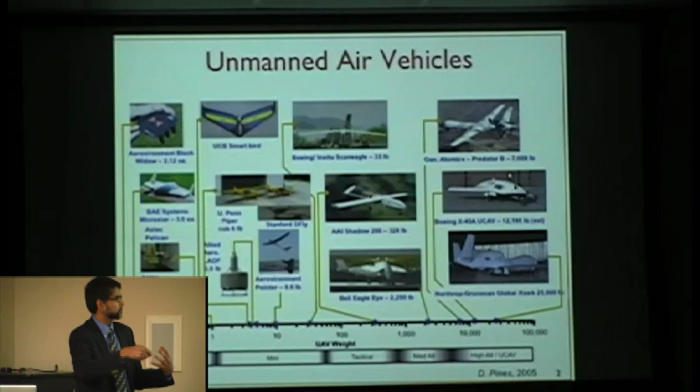So I've just stuck in here some of the vehicles that we operate with. So we use off-the-shelf platforms that we then modify for our own work. We work with a company in Germany called Ascending Technologies. And they make a class of UAVs in the range of between 500 grams to 1 kilo. So a lot of what I'm going to talk about is based on the Hummingbird platform, which is, like I said, 500 grams, about half a meter in diameter, about 8 centimeters in height, and which consumes between 70 to 90 watts of power. So relatively speaking, it's small.

And one of the things I'd like to point out is as you scale things down, as is well known, mass goes as length cubed. Moments of inertia go as L to the fifth. And so if you want things that are highly maneuverable, scaling down L makes sense. And it turns out that the angular acceleration that you can get scales up as 1 over L. So as you make things really small, you can get things to really maneuver quickly. And that's really what we're trying to leverage when we build these autonomous vehicles at a smaller scale.

So we're not the only ones to try to do autonomous micro helicopters. And this is just a sampling of some of the work that's out there. Pieter Abbeel at Stanford, his claim to fame is that he made helicopters fly and do all kinds of acrobatics by using iterative learning techniques where essentially with a model that's very coarse, he was able to iterate on feed-forward trajectories, feed-forward parameters to perform a range of acrobatics. And I encourage you to go on YouTube, there's lots of videos, it's really impressive work.

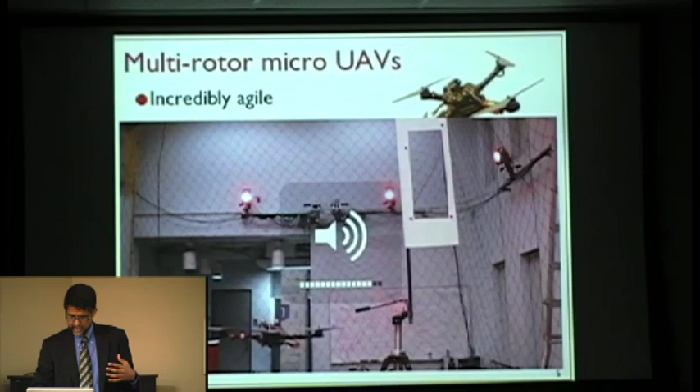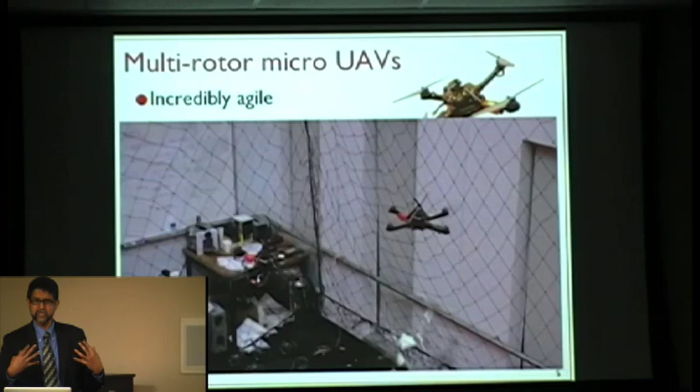We use these with a motion capture system. We use a Vicon system, 16 4-megapixel cameras that look down at this rotorcraft and provide state information at up to 300 hertz if you wanted to. So what you see here are examples of the kinds of things we can do, where we're able to run this through narrow gaps. We generate these trajectories automatically, and they are executed with onboard computation, autonomously. Of course, the perception problem is trivialized because we have really good state feedback.

And this allows us to generate trajectories with errors which are less than 1 degree in pitch, incredibly accurate trajectories, and plus or minus 2 inches in terms of position.

I can't believe this. I thought this was a Mac and these things don't happen. True. And actually, as I was showing Sarah, I have some videos of ants in this presentation. And so, there are bugs in the presentation. Sorry about that. Actually, I think maybe there are too many videos here.

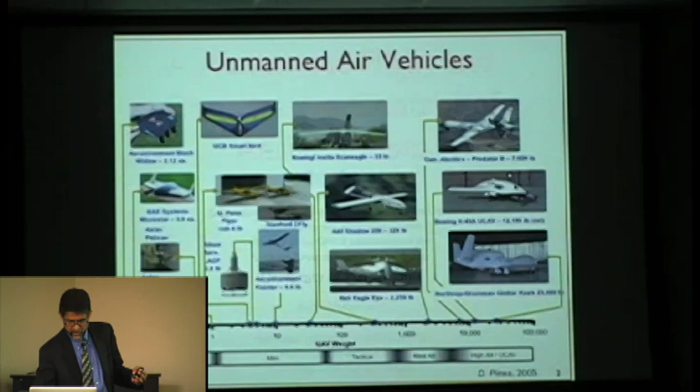So anyway, as I was telling you, there are two chapters to the story. The first chapter is one that really relies on good state information from external sensors. In the second part, we're going to relax that assumption and go to onboard sensing. And you'll see the gap between those two stories. We hope to complete the story by bringing in a chapter in the middle that bridges the two pieces.

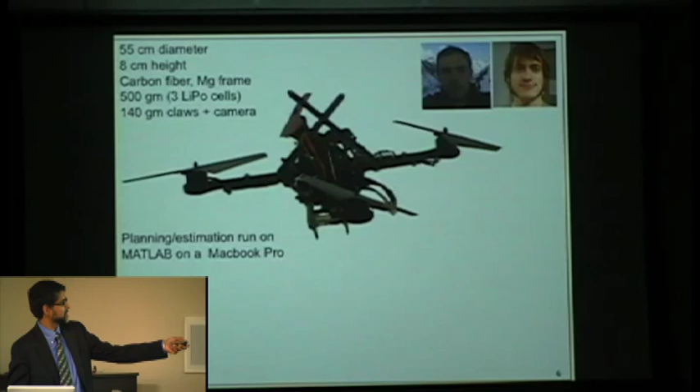Just a little bit about how we do these experiments. Here's the same robot. Now it's equipped with a gripper, which is actually a mean-looking claw. I'll say more about that. And everything that you see here is actually computed in MATLAB, running on a MacBook very similar to mine.

We use a bridge to a middleware called ROS, Robot Operating System. This bridge allows us to connect heterogeneous devices like this Vicon system, interfaces to the onboard high-level processor through a Zigbee type serial interface.

Updates here come at the order of between 200 and 300 hertz, but we only do the computations at about 100 hertz. But things happen on board at much higher rate. At the low level, it happens at 1,000 hertz, and this high level processor happens about 100 hertz.

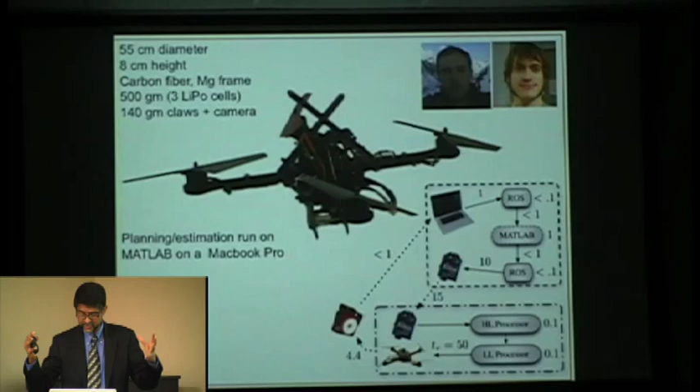So what I'd like to do is to tell you how we generate trajectories automatically, and then how we control to follow these trajectories. So some of this is a tutorial, so perhaps starting graduate students will appreciate this.

In order to solve this problem, you have to understand the dynamics. Here's a very simple picture. I have an inertial frame and a body fixed frame, and I have 4 rotors. The pairs of rotors spin in opposite directions. This one, positive rotation here is counterclockwise looking down. Here, the positive rotation is clockwise looking down. And the pitches are reversed so that when all of these are spinning at the same speed, you can actually get hover-like conditions.

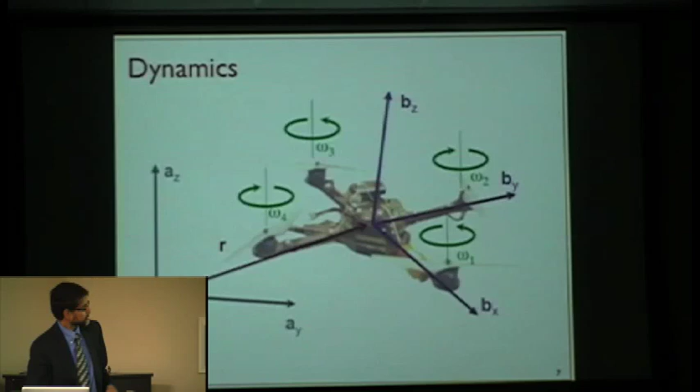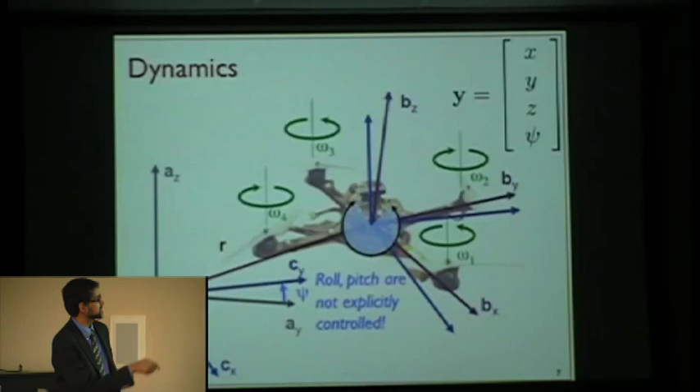So what we'd like to do is to control the position and the yaw of the vehicle. There are 3 variables here and 1 variable here that you'd like to control, and those are your outputs if you look at it as a control system. The inputs are actually roll and pitch implicitly, but explicitly it's omega 1, omega 2, omega 3, and omega 4. By changing the omegas, you can change the lift at each of the props, and you can also change the drag, where these 2 are drag coefficients. And if you can figure out what omega 1, omega 2, omega 3, and omega 4 are for this problem, then essentially you've basically solved the controls problem.

Remember this is a nonlinear problem, and what we'd like to do is synthesize a control that automatically generates these 4 inputs.

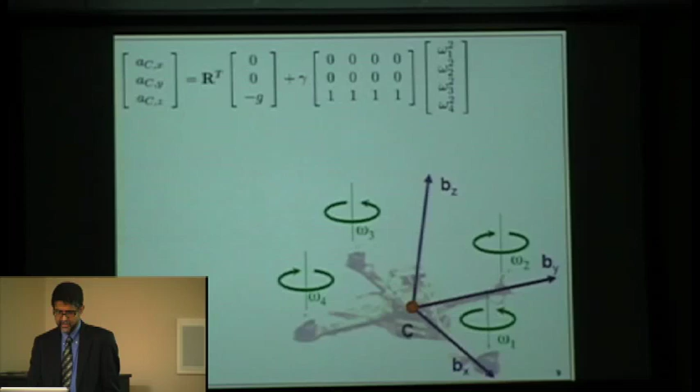So how do I do that? If you write down the equations of motion, the first set of equations are just Newton's laws, which basically say that the acceleration is proportional to, well, there's an offset here which is due to gravity, and then has to do with the net thrust that you're getting from all the props. Gamma here is just a function of the drag coefficient and the mass. The second set of equations come from Euler, and these are the angular pieces, where this is the moment of inertia times angular acceleration. This is the cross terms having to do with the angular velocities. And then the alphas and the betas here are again coming from the drag coefficient, the dimensions of the machine.

The important thing to remember here is that if I look at these equations, there are only 7 parameters that I need to worry about: the 3 inertias, these 3 parameters, and then the motor constants, which I haven't listed here. But if you know what those 7 parameters are, you can approach this nonlinear control problem in a very formal way and try to solve that, which is exactly what we did.

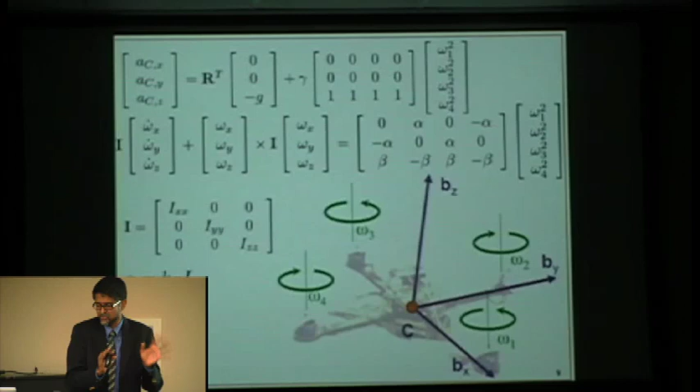So to give you some intuition as to how we do this, I just want to remind you that if you look at the combination of the omegas, if you just sum them up, that gives you the net thrust. So you can control the force in this body fixed frame. When the robot is tilted, you can control the force along the local z-axis. A different linear combination of the omegas allows you to control the body fixed moments, the moments about Bx, By, and Bz.

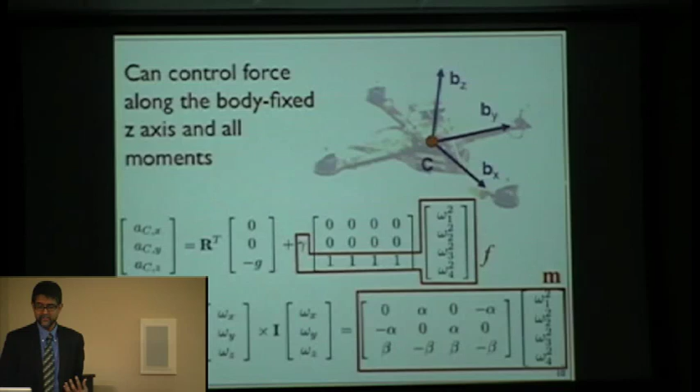So the real problem then is that if I have a trajectory, which is given here in the space of translations, R3, and SO2, which is the yaw piece, what should the moments be and what should the net force be in order to track that trajectory?

So you'd like these errors to go to 0. You'd like to drive the position error to 0, the yaw error to 0. But to do this, you can't really formulate it on this space because this only has the translation and the yaw. You also want to factor in the roll and pitch. So you really have to talk about control on the bigger manifold of all positions and all orientations called SE3, which is the special Euclidean group in 3 dimensions. And here's the idea about going about designing such a controller.

So you're given this controller, you're given this trajectory, which is the position and the yaw angle as a function of time, and you want to follow it. So in your very first class in controls, if you're given a linear problem, what do you try and do? You try to derive some sort of a proportional derivative feedback law to follow that. That's the intuition here.

So you want the total thrust to be a function of the position error and the velocity error. This is a feed-forward term that tells you what the desired acceleration is. And then this last term compensates for gravity.

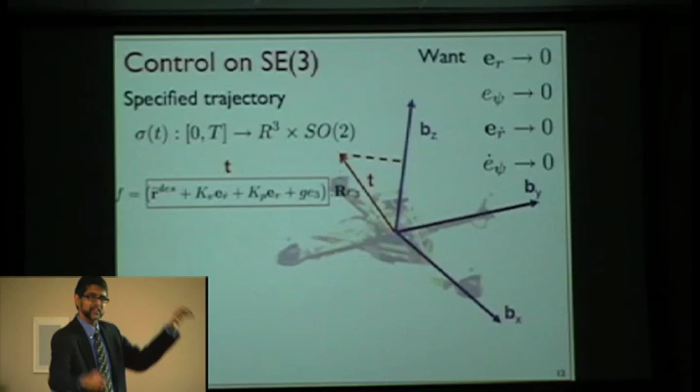Okay, so it doesn't guarantee that the errors will go to zero, but this is the best I can do. Then the second thing we do is to try to rotate Bz so that it moves along t. So if I do that, then a combination of finding the right projection and rotating it along t essentially does what I want to do intuitively.

So we determine what the desired orientation is using two pieces of information. First, the fact that I want to point along t. Second, the fact that I want the yaw to be the specified yaw. So if I combine both of those things, it turns out you can find R desired.

And if I know what R desired is, I can compare the desired rotation to the actual rotation. And here things get a little ugly because comparing two rotation matrices is hard. So I use a well-known result, which you know from studying the special orthogonal group in three dimensions: if you take R desired transpose times R, and then take the log operation on SO3, you basically get the error between those two things.

So you get the error in rotation, and then you differentiate that, you get the error in velocity. I don't have the expression for that, but the rest of it is simple. It's similar to before. I take the proportional error, and I take the proportional term corresponding to the velocity error. And then I compensate for omega cross I omega, and that's what I want the moments to be.

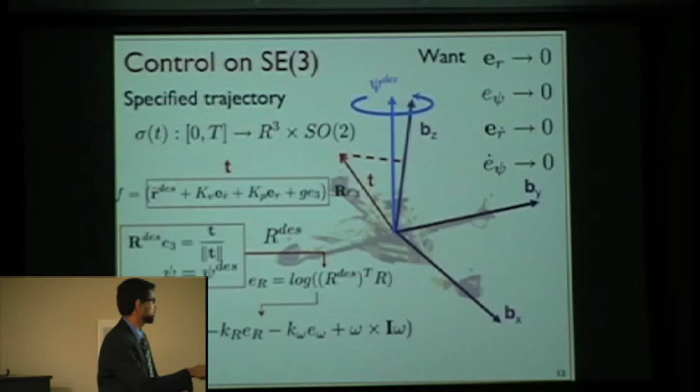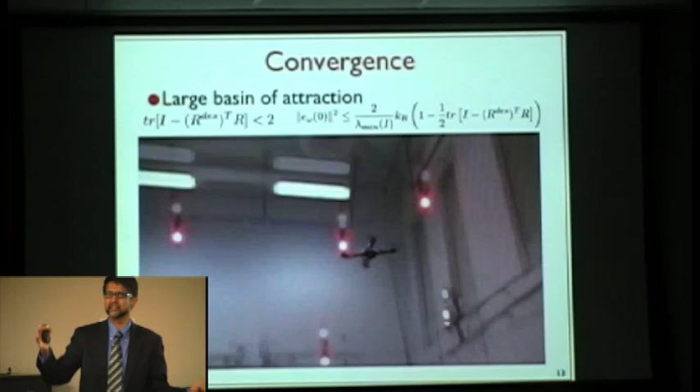So essentially these two quantities, the body fixed force and the body fixed moment, are my two sets of inputs, which I then have the quadrotor follow. So when I command that, the resulting controller actually has a fairly large basin of attraction. So in all these videos you see, the basin of attraction looks like it is almost all possible orientations and all possible positions.

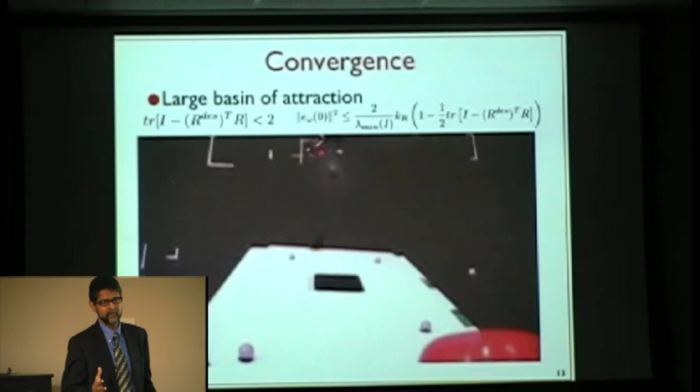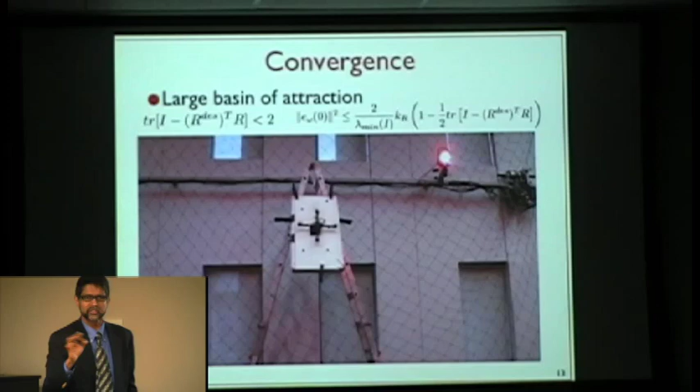But in reality, mathematically, if you derive the basin of attraction, it turns out to be almost everywhere. This basically says that you can converge from every point except a point that is directly opposed to where you want to be. So if I want to be here, and if I'm exactly the opposite way, then I cannot converge from that point. But that's only one point, so there's an almost everywhere convergence result, which is very powerful.

The second thing about this is that if you look at the angular error, the orientation velocity error that you can tolerate, that actually turns out to be directly determined by how large your robot is. I just want to show you that expression, because we use that to determine things. So that's really the motivating factor behind making these robots really small. Let's see if I can find that slide.

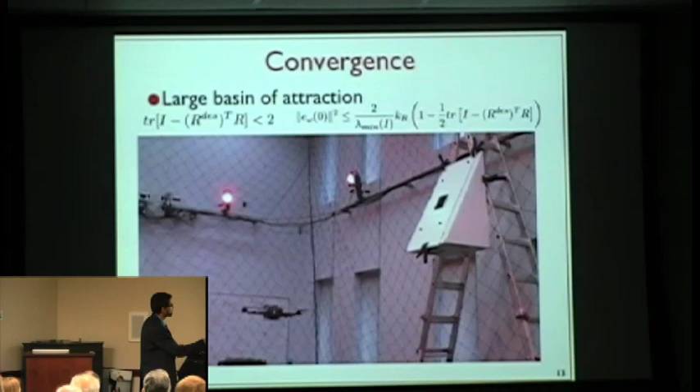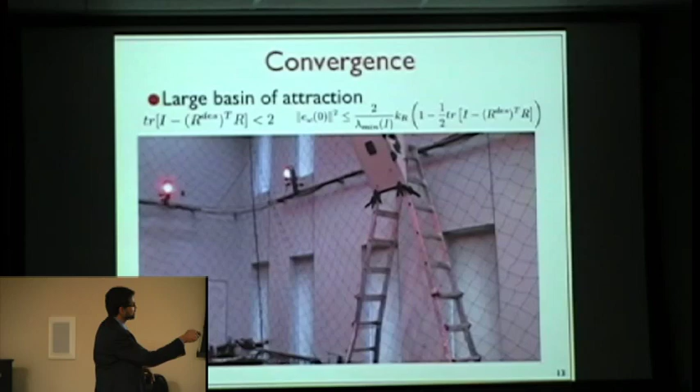I wanted to show you this term, which says that the initial error you can tolerate in angular velocities is determined by how large your robot is. This is the smallest eigenvalue associated with your robot inertia. The larger the smallest eigenvalue, the smaller the errors you can tolerate. So small aircraft allow you to maneuver more quickly, which is the intuition. But when you design this controller and analyze its dynamics and basin of attraction, that pops right out.

In the picture you saw, you manipulate by hand. Which picture? The demo we just saw. No, the trajectory—I haven't talked about the trajectory generation yet. Have you shown the trajectory you want to follow? I will show you in a minute. So that was your problem that you studied—trajectory following. What I showed you here is control, and as John says, I haven't told you how to generate the trajectory. This is the control piece.

Is there no need for model predictive control? So we don't need it. Why? I'll tell you what we do to adapt to unknown dynamics. There are 7 parameters that we don't know very well, and those vary from robot to robot, from day to day, so we need to adapt to that. I'll tell you how to do this.

The only trickery here is that we use some Velcro to do this perching, which I should mention—control theory doesn't do that. So how do I specify the trajectory? I assume here that I know the trajectory.

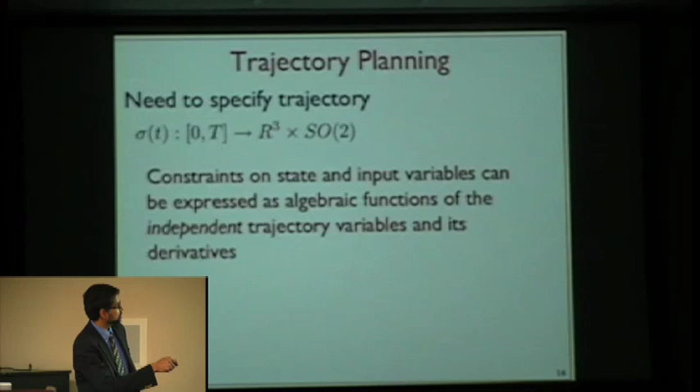This can be very complicated, but we choose the simplest possible way to solve this problem. The key observation is that if you take the position and the yaw that is specified to you—that's x, y, z, and then the yaw we're calling psi—any state and input variable that I need: remember, the state is all positions, velocities, accelerations possibly, and the inputs are forces, moments, and so on. It turns out these are just algebraic functions of x, y, z, and psi, the independent trajectory variables, and their derivatives. Any variable of interest you can come up with, I can write as an equation involving derivatives of only these 4 variables. This property, to people who know the literature, is often called differential flatness.

Intuitively, all this is saying is: if I have these 4 variables and I differentiate, it's clear I can get velocity from position, acceleration from position, just by differentiating. What's not immediately obvious is that I can also get the rotation matrix by differentiating, as a function of acceleration and yaw. By differentiating further, I can get the angular velocity and then the angular acceleration. So any variable of interest I can get just by differentiating this as many times as I want.

That's the key idea. So any constraint I have—such as a window I want to fly through, or angular rates I don't want to exceed, which turns out to be 300 degrees per second max—all those things get baked into constraints as a function of x, y, z, psi and their derivatives.

What happens to uncertainties? Which uncertainty? I look at the window, it's fuzzy—if I differentiate, what do I do? Okay, so here perception is solved; I know exactly where everything is, and I'll tell you how we iterate on small uncertainties in a minute.

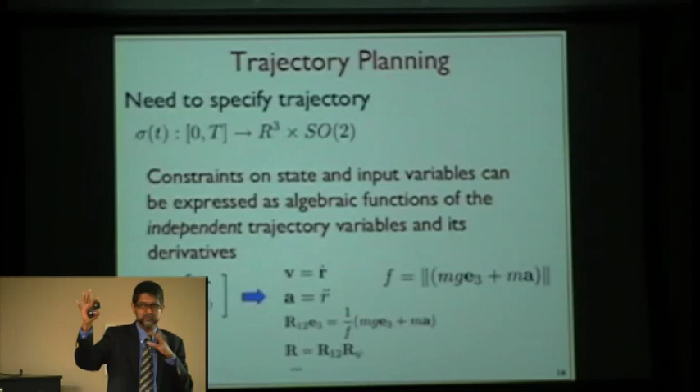So here's a trajectory problem, a planning problem. I know what this is—somebody told me I need to go through this window. I parameterize it using polynomials, and I'll tell you what these polynomials are in a minute. I discretize this trajectory.

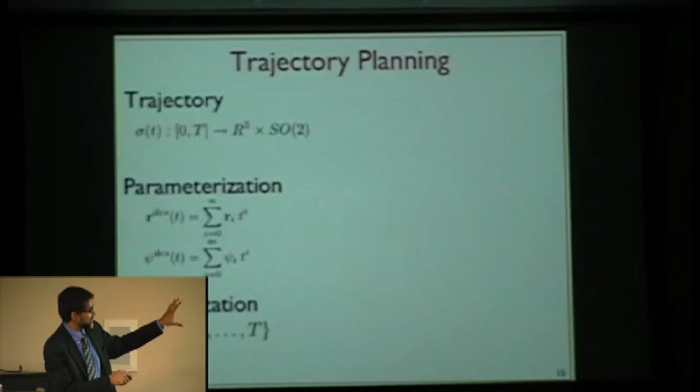What we really want to do is find a trajectory that minimizes the snap. For those who don't know: position, then velocity, then acceleration when you differentiate. Differentiate again, it's jerk, and differentiate that again, you get snap. If you really wanted to, you could go to crackle and pop, the higher order derivatives, but we don't do that yet. Right now I'm going to show you just this fourth order derivative, which gives you smoothness up to the fourth order—really what you need if you have dynamics with fourth order differential equations embedded, as is the case here. So your relative degree of freedom for the control system is 4, and this is why we find trajectories that minimize the snap.

So then you have all these constraints, and some of these can be nonlinear, and basically what we do is at these points, we linearize these constraints. So then you're minimizing something that's a function of these Ri and psi. You have all these constraints thrown in, and that turns out to be a quadratic program, which you can solve in real time.

So again, if I know the environment, I know what the endpoints are and what I need to avoid, then I can find a trajectory of this form to follow using this type of approach.

Is this offline currently? It's done on the laptop, but not on the vehicle. On the vehicle only the embedded control is done. But you change things, and the laptop will compute it automatically, and immediately the experiment is run.

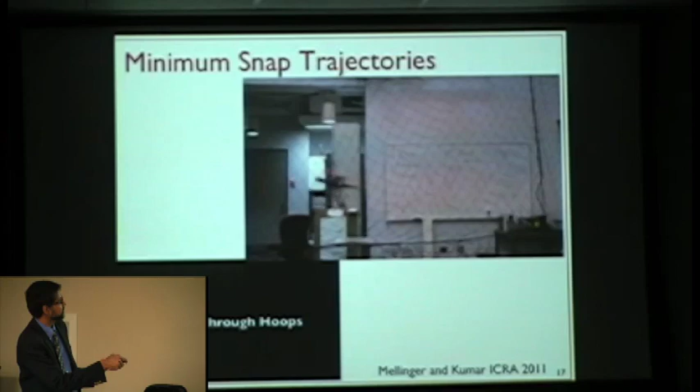So let me show you some minimum snap trajectories. This is an example of a trajectory that will go from here to here, flying through that one waypoint. The centrifugal accelerations you generate are of the order of 1.5 Gs.

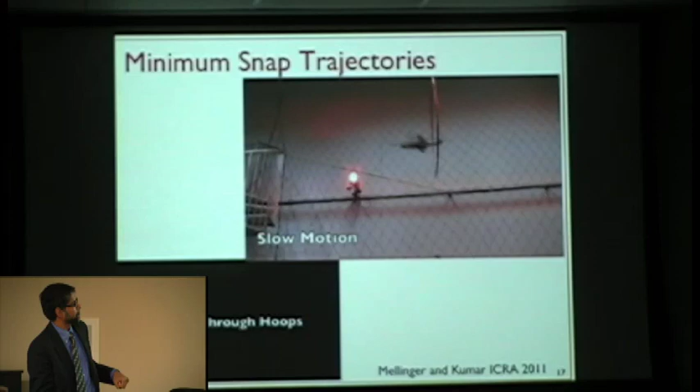And we can take waypoints that are time varying, like the hoop being thrown here. So these trajectories are generated. We developed a method for generating trajectories to optimally fly through any number of waypoints.

So this is what we do for our sponsors. We go through hoops, jump through. But again, just to show you that you can have multiple waypoints, and you can fly through those.

And so then comes the question: can you really do these kinds of trajectories using the approach that I showed you? And the answer is not immediately applicable. The reason is that passing through this requires very, very tight controls on pitch and roll.

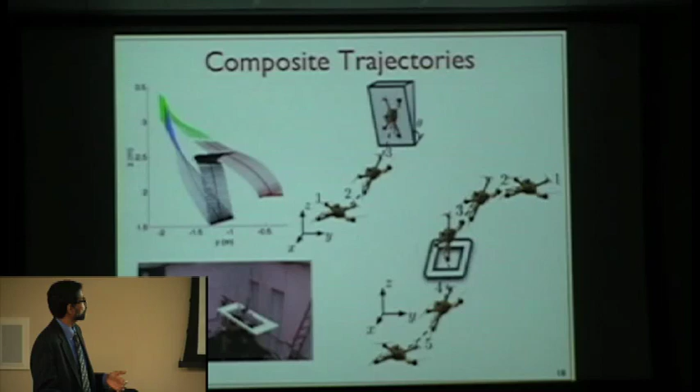So what we have to do is actually piece together different trajectories. We designed different trajectories, and we spliced them together, again, in a semi-automated way. People who know the mode switching literature, it's the third time in a row, will know.

So what we do is we have a controller that generates trajectories, and then we have another specialized controller that ignores the position part and just focuses on the yaw and the roll and the pitch. So if I accelerate, get momentum, and then just flip my body and get through that window, I can then recover using a trajectory controller. We essentially piece these things together in this work.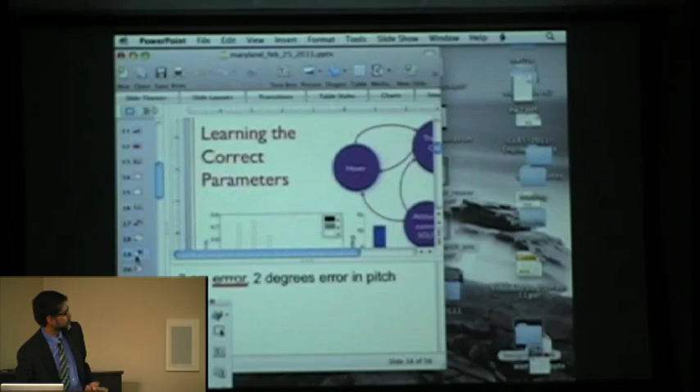Do you have questions about this? When you piece the trajectories together, is there a discontinuity or possible instability problem at all? No, we're looking at the snap variable to make sure that everything is continuous, is C3 continuous in composite. Even when you switch? Yeah.

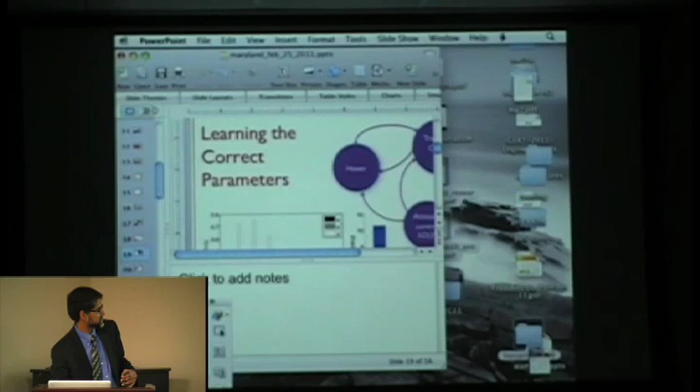Last one, please. It's very clear how you specify X, Y, Z, but how do you specify psi? You can specify various time histories of it. But that's what I was trying to show you, that if you tell me what X, Y, Z, and psi you need as a function of time... I don't know psi. But you don't know psi. Okay, good. So if you don't know psi, it'll find the best possible psi that optimizes that function.

So this is a two-point boundary value problem, and if I start off with some psi and say I want to go to this psi, it'll find the best possible sequence. If you don't specify the endpoint, it'll just find the smoothest trajectory, which for this particular case, if you don't specify this, it'll just keep that same orientation.

So if we go to collaborative control, I don't know if you're going to go there, but then I am going to tell you the trajectory in real time, and that's why I'm asking this question again and again. Can you compute it on board? We're getting to the point that for this machine we cannot. For the other one that I'll show you, we can. And in particular, as you go to smaller vehicles that we're interested in, that's going to become an issue.

Yes. So you asked about the question. So what if you don't know the parameters? No matter how much modeling you do and how much theory you do, as I think it was Yogi Berra that said, theory and practice are not the same. In theory, they are. But anyway, so you have to do some adaptation, and this just gives you...

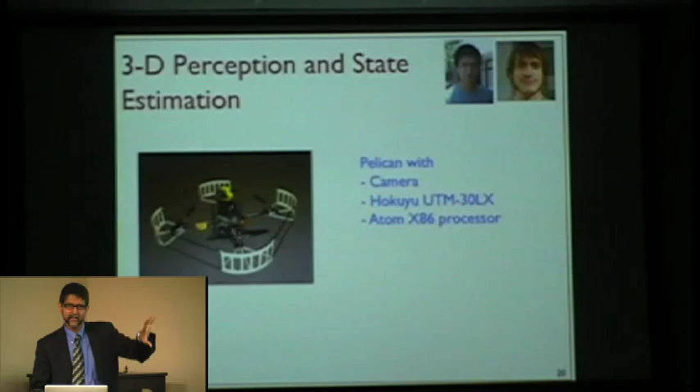We have laser scans, and these are 2D laser scans coming in at 40 hertz. We have some mirrors that are arranged that basically allow us to get reflections from the top and the bottom. And then we have imagery that comes in at 2 hertz. And remember, you're doing everything on a 1.6 gigahertz processor, so you really cannot crunch on imagery in real time. You just don't have the oomph to do this.

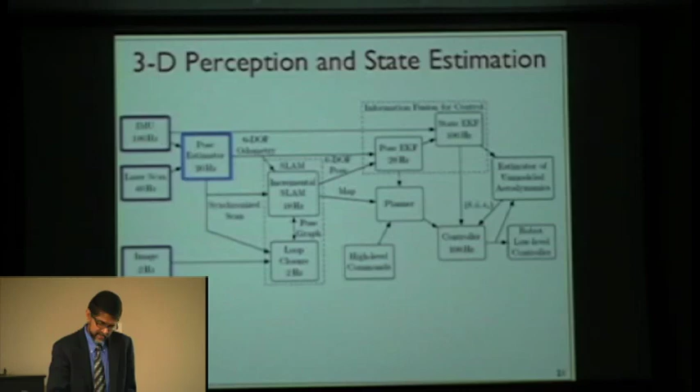So if you look at that netbook processor, 30% of its work is just spent on getting odometry information, which is this first block. What this does is it looks at the laser scans, and it looks at incremental motion as predicted by the IMU, and it matches those using a technique called ICP. This takes about 20 to 30% of the CPU, and at the end, what you get is 6 degree of freedom odometry in the sense that at every time step, you get a sense of how much you've moved in XYZ position, roll, pitch, and yaw.

Then the second thing we do is try to now understand where we are in the environment, where we build an occupancy grid. So you divide this into a 3-dimensional grid, X, Y, and Z direction, and every grid cell is either occupied or not occupied. And then you try to figure out, after an incremental motion, if the measurements you made before are consistent with what you have now. This technique is loosely referred to as simultaneous localization and mapping. And so incrementally, we get pose estimates.

And between these two, you have 50% of the work that's being done, just to figure out where you are. So that Vicon system starts looking really attractive at this point, right? So half the processing is just figuring out where you are. And so the rest of it, I just want to highlight.

So then loop closure is another important piece. When you go around the hallway, and let's say you do a full circle, come back, you want to recognize that you're back at the same location. Otherwise, the maps that you build have a tendency to drift. And so this ensures that your maps essentially get straightened out. It's like solving a constrained optimization problem. And this is also done on board at a much slower rate.

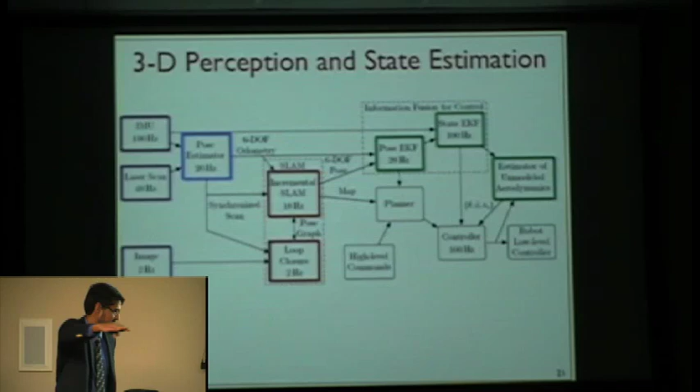So one of the things, not being very familiar with this, that was really surprising to me is that if the robot goes from free space on top of this table, the flight characteristics are just very different. And so this is sort of adapted, so although it doesn't know about the table, it knows it needs to be at a certain location, and if it's not, then it basically says, well, I've got to add on to my thrust, and that's one parameter.

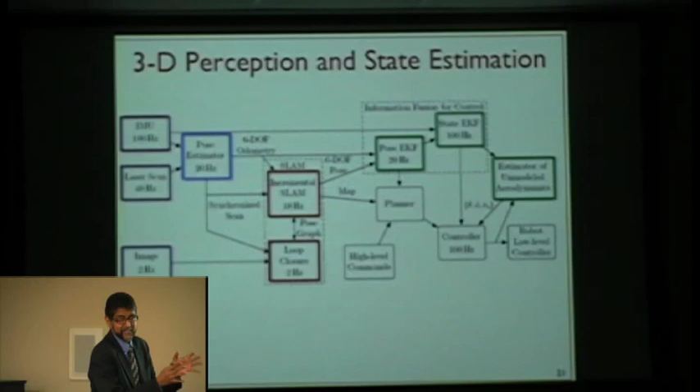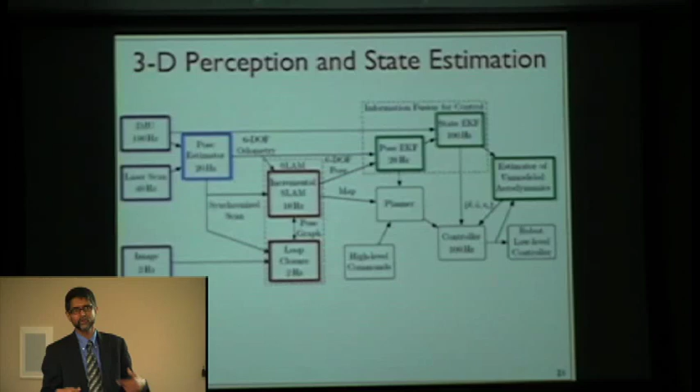These are parameters that appear linearly in the equations that the robot calculates on the fly. So all this is done without the fancy nonlinear dynamics that I showed you earlier. When you're doing all these computations, you cannot afford to have the pitch, the roll, etc., deviate significantly from the nominal hover position. And like I said, these are two stories that are somewhat disjoint and they're bookends to the real story we want to tell eventually. So this is all based on linearized dynamics. Otherwise, to do adaptive control is very, very hard.

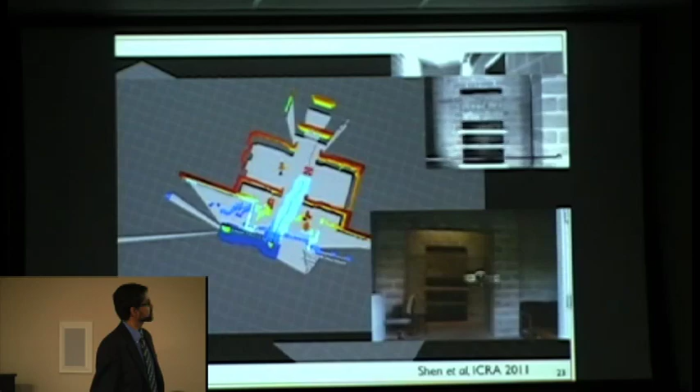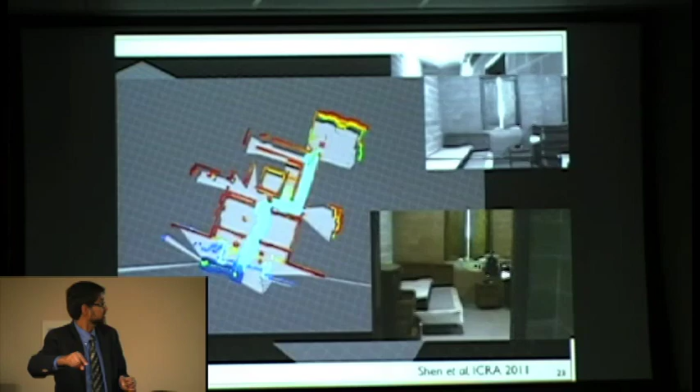So you take a robot, you just ask it to go inside, and it starts building a map immediately. So blue here is the ground floor, right here. As the colors get hotter, you're going higher and higher. And the robot basically plans a path. This red trajectory is what it plans based on inputs given by the human operator. So the human operator in this particular case essentially tells the robot, I want you to go here, and the red trajectory is planned in the X, Y, Z, psi space.

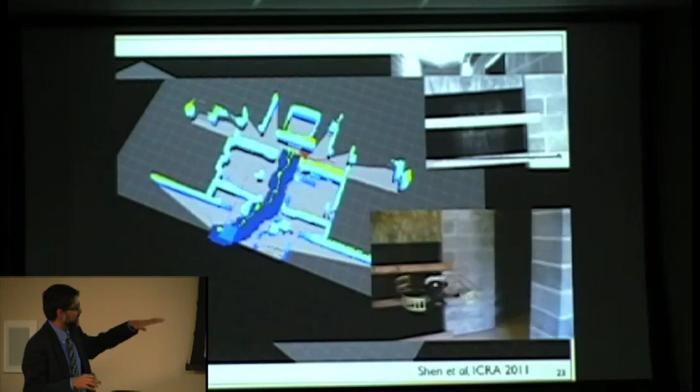And then the robot essentially tries to follow that trajectory, and you can see the occupancy grid map that's being created online. And so this is actually fairly tricky, especially when you go through confined environments like this, where again, the wind flow conditions change quite a bit, especially when you go upstairs, with this discontinuity at every step. So this actually looks relatively simple. It's a really hard experiment to do.

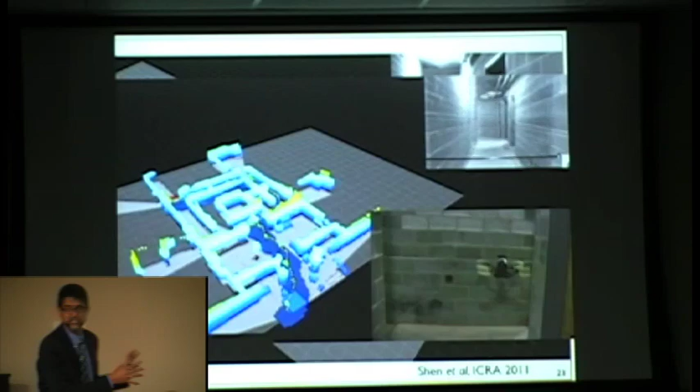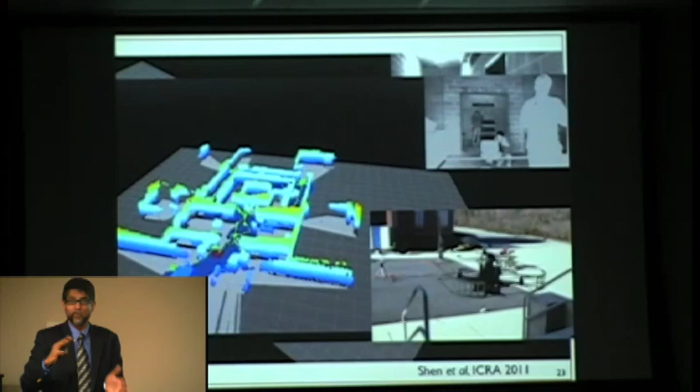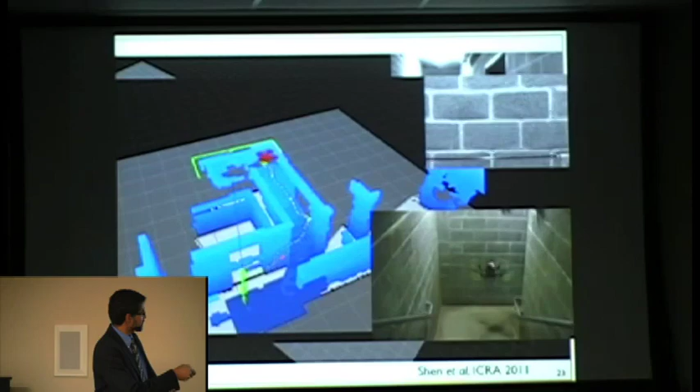And we've gotten it to the point that it works really robustly if you are in these 2D, 2.5D buildings. So it won't work, for example, in a Frank Gehry building where there's no sense of what vertical is and all the walls are curved. But in most human-made buildings, I think it will. What information does the vehicle have a priori? Nothing. It has no GPS. It has no information about the environment here. And you can see whatever it's building is right here. But it is assuming that the world is 2.5D.

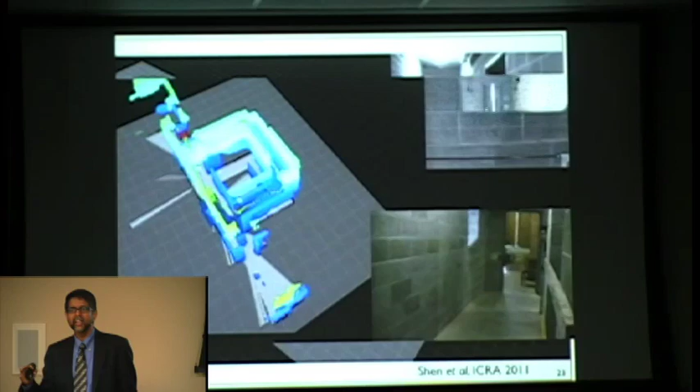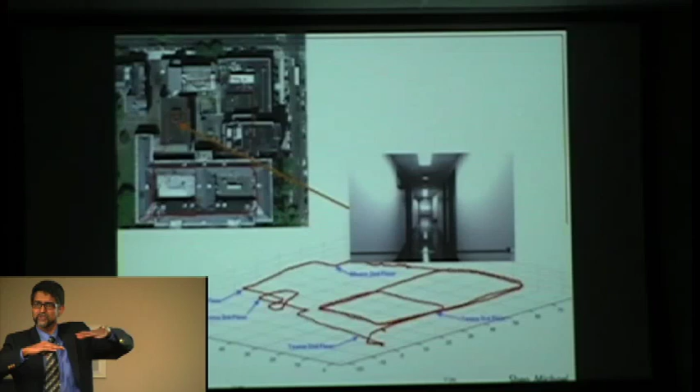Okay. So if you go into a canyon without a horizontal surface, it's going to be lost. So it finds the obstacles and all that stuff, right? Yeah. It does all of that. And if I have a wall that is 3/4 to the ceiling, will it find the opening? Yeah, it's not a problem. Actually, I will show you stills of pictures; you've been to Penn and you know the 3-dimensional nature. There are mezzanines that don't extend all the way, and these are experiments that we have run.

So at an engineering complex, all the buildings are connected, but the connections are sort of piecewise continuous, right? So you go from the 2nd floor to the next building, which happens to be the 3rd floor, and then you go to the next building that happens to be the 2nd floor. So you have to go up and down, and it's exactly the kind of thing you're referring to. But again, the saving grace is the walls are roughly vertical and the floors are roughly horizontal. Not true for stairs, not true for ramps, but when you have a ramp, the walls are there. And so it uses all these correlations to basically figure out where it is.

So this map was actually not generated automatically. Shaojie Shen actually had to carry the robot through all these different corridors and so on, not because we couldn't do it automatically, but because we don't have enough battery life to run this whole mission. And so that's a sad commentary on the state of power and battery and so on, but it's reality. So the robot was hand carried most of the way, just because we couldn't get the data.

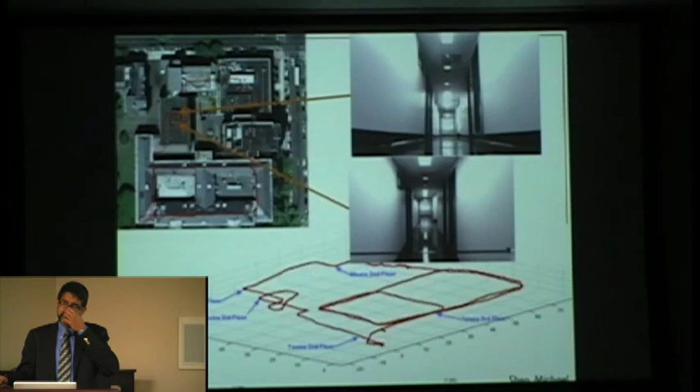For the two vehicles you showed, what is the actual flight time on the batteries? Do you know? About 12 minutes. 12 minutes. Yeah. Okay, thank you.

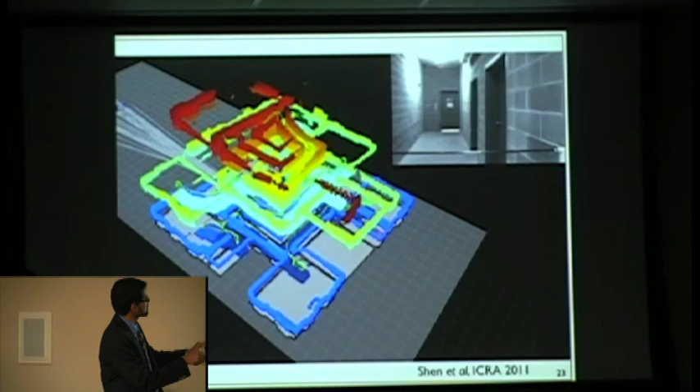Sorry, in the mapping you were giving it points to go from here to there, if you do the trajectory? Yeah, so remember what the user is seeing is really this picture, right? And so if I'm looking at this picture and let's say I'm over here, I can say, well, this area looks like I need more information, so I click on that and it generates a trajectory. And that's what I was trying to show you with the red line that sort of snaked out. So right now it just went up vertically. So there's the red line. So that piece it's planning, and it's planning in this obstacle-filled environment.

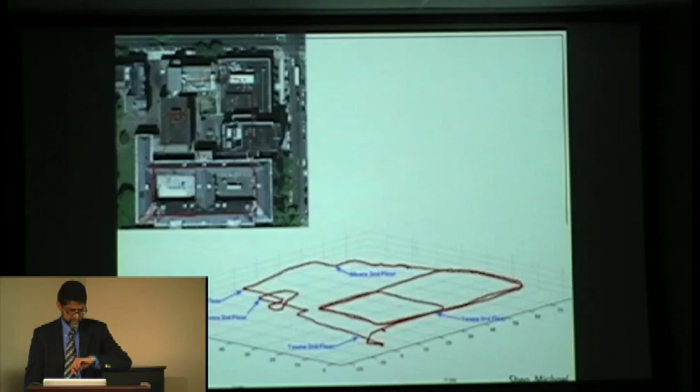Okay. So this is the piece we're trying to link up to that earlier piece that I told you about. So we know how to do control in really complex spaces, and we're trying to sort of catch up in terms of perception, try to figure out where we are. And if we could do this at 100 hertz, and if the robots could be really small, then those two stories could be told back to back. But right now there's a missing gap.

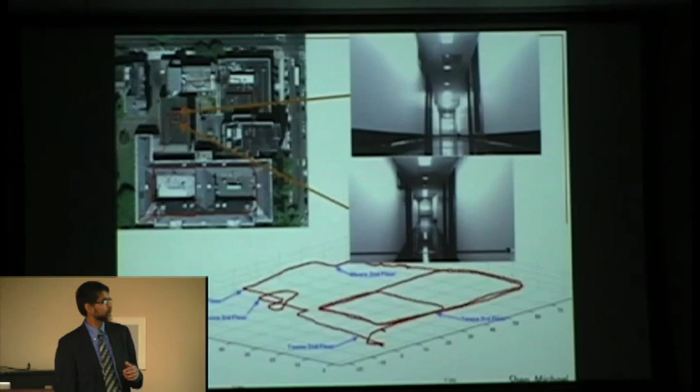So the last thing I want to show you, and this is one of the things that John was asking about, is how do we actually do cooperative manipulation and transport where there has to be tight coordination?

One last question on the previous one. Yes. As you try to marry those two, and you go to smaller vehicles, and you want to do everything autonomous, and you have less computational resources, you don't anticipate there's going to be a problem of delay in the computation? That matters? Yeah, so this is why I said we have to do it at 100 hertz. You have to have a filter that comes at 100 hertz. Remember, that's why I asked you in the beginning, you don't think there's going to be a benefit if you do a little bit of prediction ahead? Because if you have your sensors and you know where you want to go, you can do a little bit of look-ahead and then compensate for any delay you may have later on. No question. Okay. So here we're basically saying we know nothing, and there's no prediction with it.

In a partially known environment, I think there are tricks like this you can play. But the one thing I'll tell you is, a lot of what you're seeing is the result of working with different sensors, with different frame rates or different update rates, with different accuracies. And there's no systematic way of saying, well, if I have something at 100 hertz with this kind of accuracy, something at 40 hertz with this kind of accuracy, something at 2 hertz with this sort of accuracy, how do I combine this and design a controller that runs at 100 hertz? And you would think that by now we would know how to do this, even in the linear domain, but this is actually pretty hard.

And so a lot of this, I'm embarrassed to say, is just some really good engineering. Students who have amazing intuition. And I wish I could write all these equations and say this is the best way of doing it, but we can't.

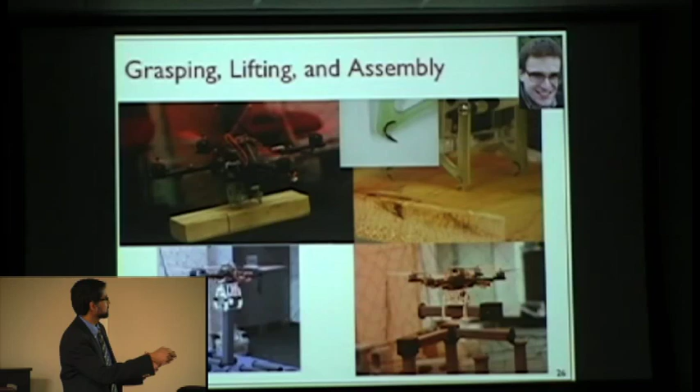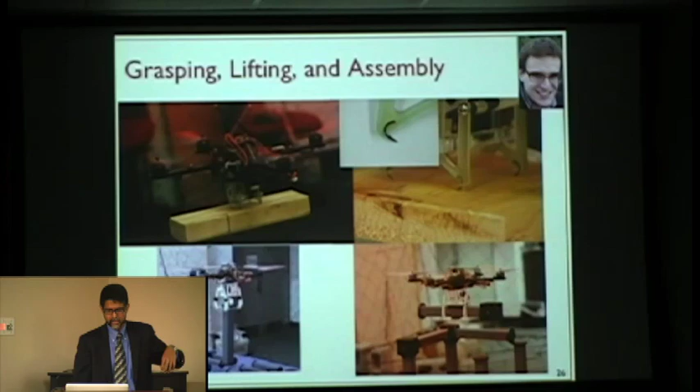So I want to tell a story about how we do cooperative transport and cooperative assembly. So some of this is Mike Shomin's work, where we've been designing these grippers, which are two-part epoxy resin polymers with embedded fish hooks, so you can actually grab onto things like this and perch on tree trunks, tree branches, and so on. More benign grippers are these, where you can pick up objects like this, and I'll tell you a little bit about construction.

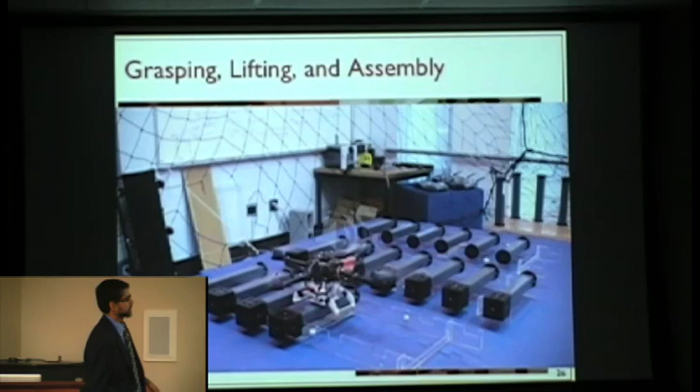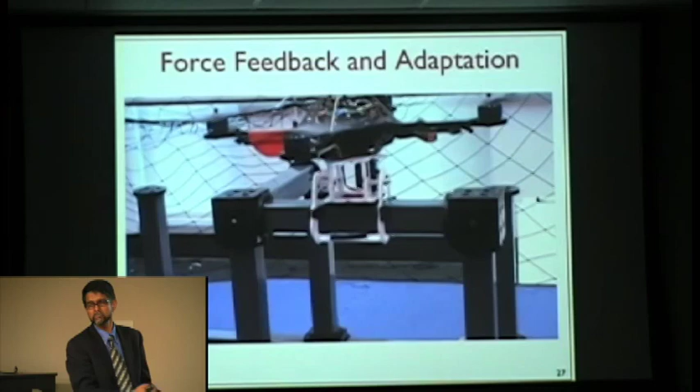So these are very simple objects, very simple grippers that we can use now to pick up things and assemble things. The assembly here is achieved by snap-fit fasteners, which is essentially a set of embedded magnets. So we've trivialized the assembly problem. So you'll see here that the robot tries to assemble, and it looks at the reaction forces it gets to figure out if it assembles things properly. So there's no perception here, except for the feedback that it gets from its own motors.

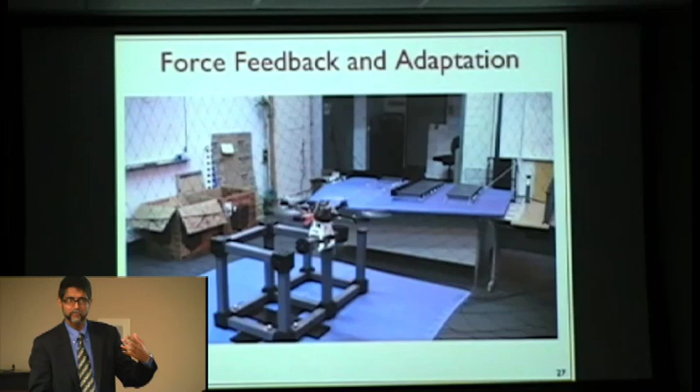But using this approach, you can actually assemble large structures pretty quickly. The only limitation, again, is how much time can you fly. And we're down to 12 minutes, and it looks like I have problems other than battery issues here.

Okay, so what I want to talk about in the next 3 minutes is two types of things that we've done. One is trying to figure out how to drive robots together. And the second is how we can do construction. And so these are coordinated control experiments.

Actually, I won't talk about all this. My laptop is very tired today.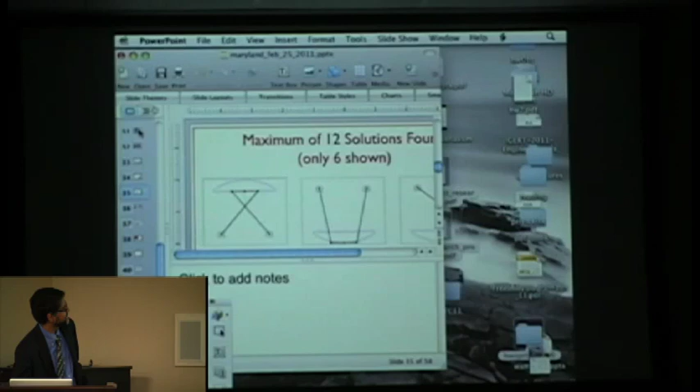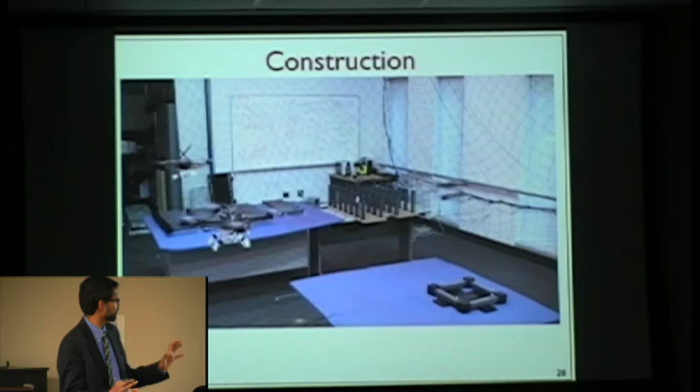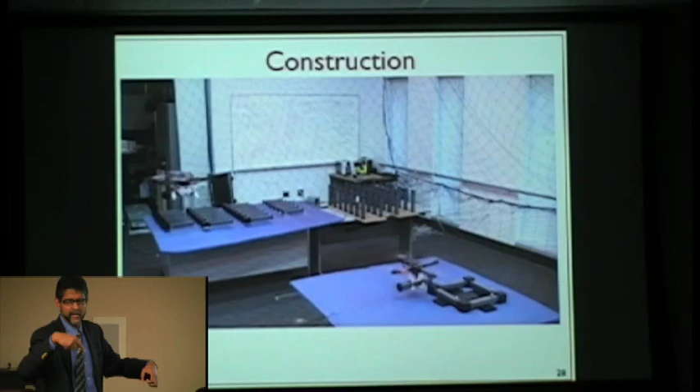So this is many robots operating in concert. By the way, this is again done with the Vicon system, and the only real sensing besides position and velocity is forces that the robots infer. Again, you have to run a parameter estimation loop on board to figure out if you're carrying something or not. Right. So if I pick up an object, if I heft it, I have a rough idea of what I'm carrying, and that's what these robots use to verify successful grasp, and then in this case, successful assembly.

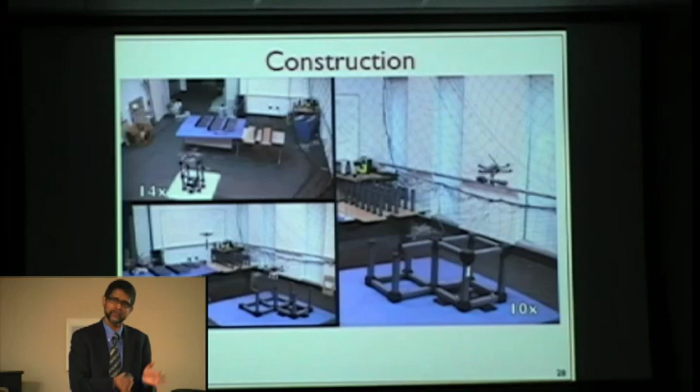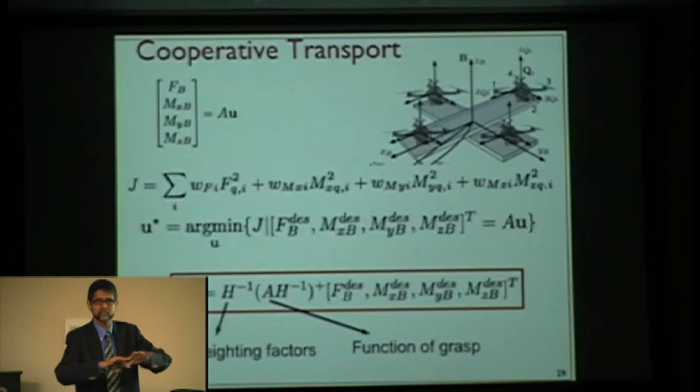The one thing we are doing to ensure that we can actually carry structures that are very heavy is to figure out how we can get multiple robots to pick up big structures. And here, what the robots do is a pointwise optimization, where given a load, they figure out what's the best way to apply forces. If you do a pointwise optimization, it turns out to be a very simple Moore-Penrose type inverse, which actually lends itself to decentralized computation. I'll skip all of this; I wanted to show you that you can actually manipulate the weights of the inverse to do this very efficiently. But I'll show you the resulting video of experiments.

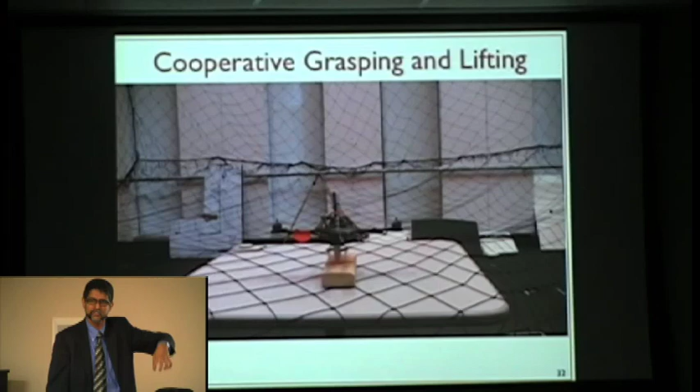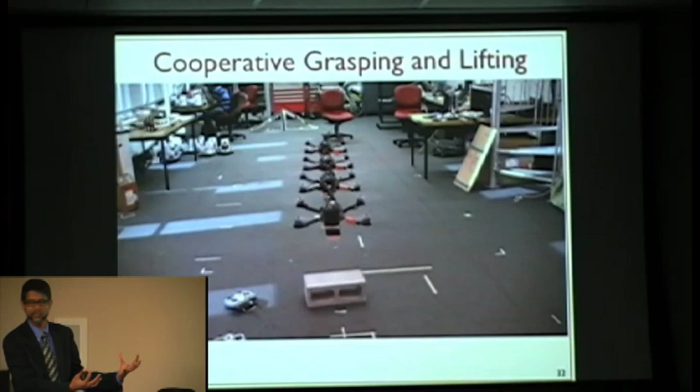So this is that nasty claw that I told you about, which you can actually use to dig into 2x4s and you can actually pick it up. These claws are amazingly strong. You can pick up 1 kilo payloads with this. And so here are robots sort of cooperatively holding things together with these claws. Grasping is a little bit of a challenge, but once you grasp it, you can actually get the robots to cooperate pretty nicely. So this is the grasping experiment. Yeah.

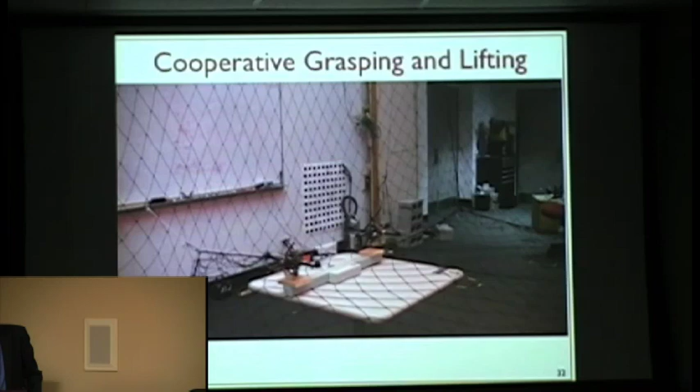The effect of the load on the vehicle. Yeah. To what extent the synchrony in grasping, you see what I'm saying? If I have a beam and I'm trying to pick it up with 2 places, right, and it's heavy enough, then it's going to create a problem. Yeah. So how do you handle that?

So the way they handle this is, you have to make sure that the controls, so remember the controls are, I control the net thrust that I apply and the body moments that I apply, right? And so now the question is, what body moments and thrust do you apply that are consistent with each other? So that pointwise optimization ensures that. So if you know what the load is, it's actually pretty straightforward to decentralize it. If you don't know what the load is, you run an adaptive loop locally to make sure that forces are... You don't need to communicate between the two? So in this case, they're only communicating to the extent that they know the task.

Okay. And they know that if you and I were carrying an object and we were doing the wrong thing, we would feel each other's interactions. Right, that's what I'm getting at. If we do it as 2 humans, we communicate via our reaction with the beam, let's say. And that's how it happens. Yeah, that's what happens. Thank you. Yeah, that's exactly what happens.

Yeah. So I think I'm living on borrowed time here, so I'm going to finish here and just talk about all these other interesting things. If I can just find my slide.

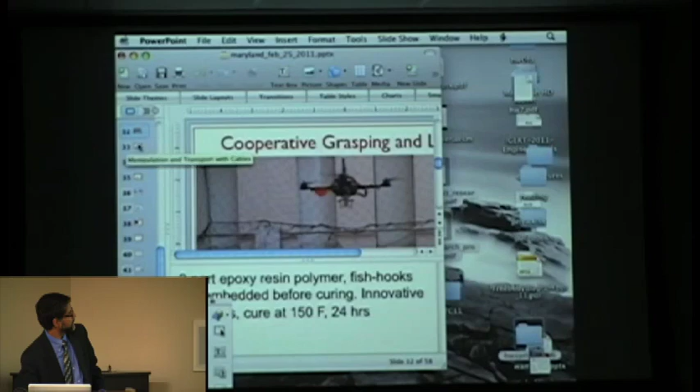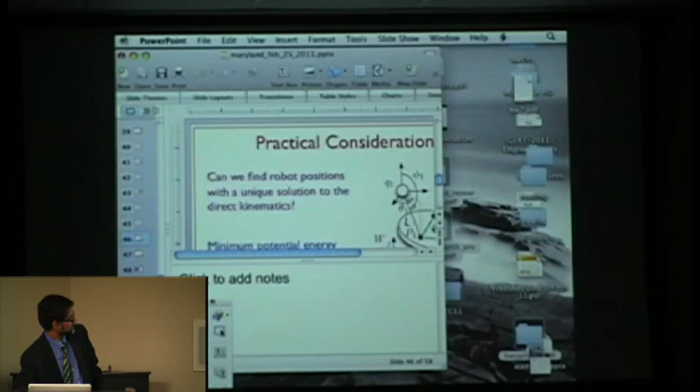So actually, I have two slides to show you. Again, what I firmly believe is that we have the ability to create these really agile micro UAVs, and the big challenge is 3D state estimation, as I mentioned. That takes 50% of our CPU right now, and that's a terrible thing. Because of these size, weight, and payload constraints, it's a challenge. If I can put all kinds of sensors on it, I can overcome that.

In fact, as we were doing this work, coincidentally, Microsoft came up with this Kinect stereo camera, and we have that on board, and it's made life a lot easier, although we don't have results from that yet. And then lastly, if you're payload limited, there are lots of ways to sort of solve that by cooperation.

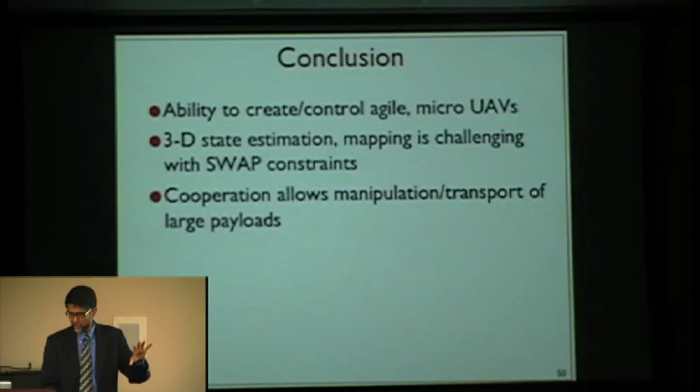So before I stop, I wanted to show you a clip from one of my favorite TV heroes who talks about our work.

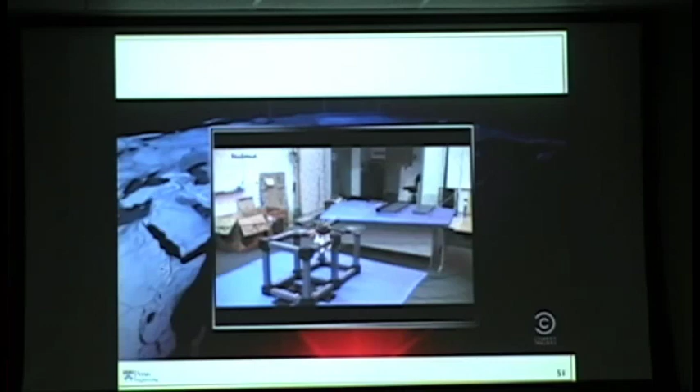For years, I have been warning about the threats of robots rising up against their human masters. Well, now scientists have reached a new milestone in our enslavement. Flying robots that can autonomously assemble magnetic rods into simple cube-like towers. There's no remote control here, folks. These buzzbots have a hive mind of their own, and apparently the first step to enslaving us is building dorm room shelves. Which brings me to threat number 2, flying robot drones. Folks, today they're constructing a 3-foot tower. Tomorrow, it's a sprawling prison for 3-foot prisoners. Provided they can build it before their batteries run out, and it can't be too windy. Even if they don't enslave us, they will crush us at Jenga.